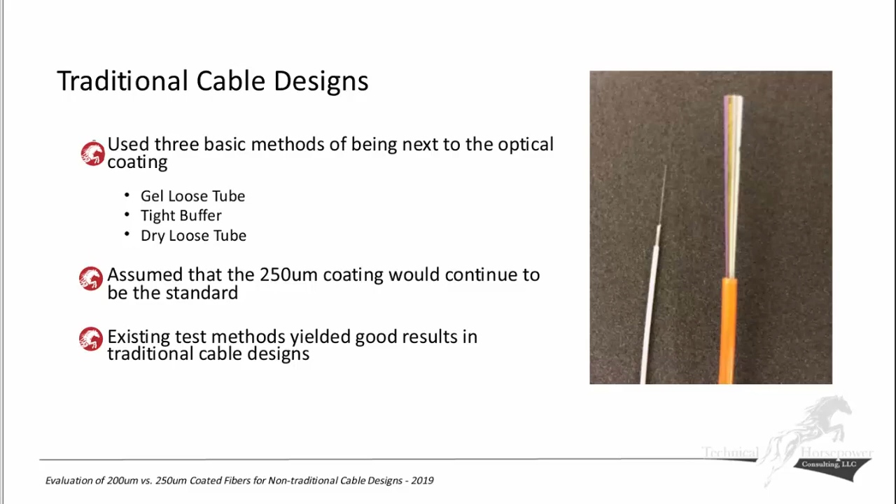Now, next generation cable designs, what are we going for? Well, we want smaller. We want them lighter, closer. Everything is packed in there. Basically, the magic number is more fibers per conduit. How much can we stuff in there?

Because our existing cable spaces are full of a number of old cables, many of which are still used, including copper cables. You have Cat5 cables in there. They all take space. And we want to reduce the costs, so that we remove extra materials and processes, and we provide more features with less. So it's a continuing growth process.

Now, when we do these things, we use a variety of things that we call our cable designer's toolbox. And those standard tools are specifications, which are pretty common and pretty familiar to most users, the history of our experiences, and a lot of this comes from end user demands. The smaller, lighter, easier to install is from the end users.

We also do a lot of testing, and that testing tells us what designs work, what designs have sensitivities or problems. I won't say failures because they're designed for a specific application, and if it fails the test, we'll know that. But other than that, we do very well. So a lot of these things I refer to as the basic designer's toolbox.

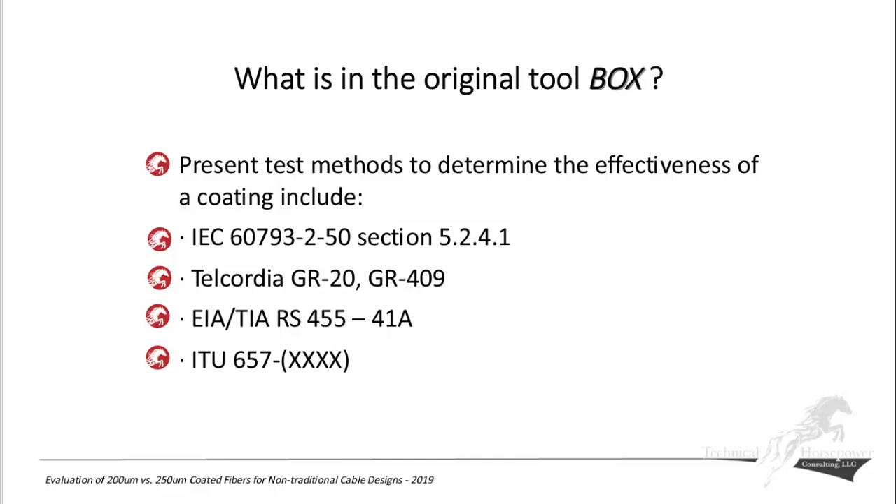So the question is really, what do we want to add to that toolbox? What have we added even to a great extent? Well, we've started with a new change, which is bend-insensitive fibers. These fibers allow us a lot more leeway in being able to manage the fiber before we stress the glass to the point where it wants to fail.

We've improved our water penetration control methods. Many of you who have been in the industry for many years will remember a variety of gels and, prior to gels, waxy substances used to block water in cables. Now we use a dry material. Basically, it's a high-tech version of disposable diapers. It's a super-absorbent polymer. Works quite well and does an excellent job of stopping water in its tracks. But it has its own set of issues that come with it.

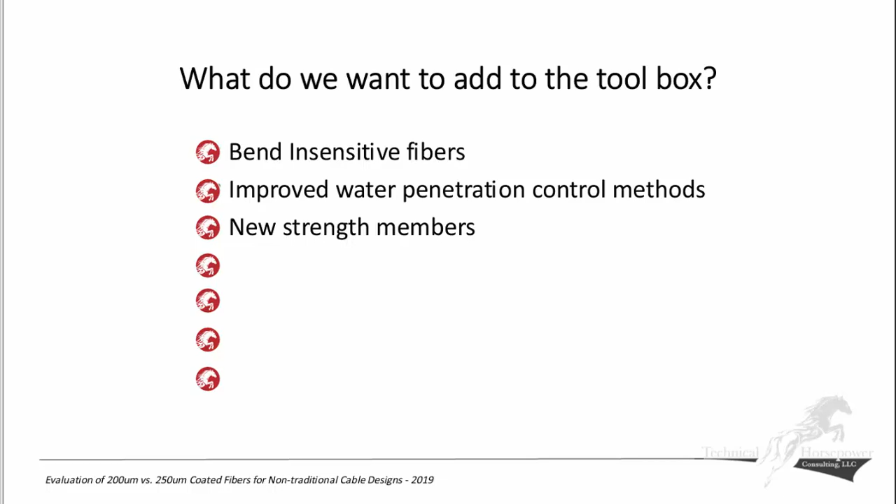We've developed a lot of new strength members. We initially used aramid yarns and, to a great extent, glass-reinforced plastic rods or even steel central members in cables. We now have a number of other materials, some of which are even extrudable. So we've added these basic components to the toolbox.

Again, we do multi-purpose layers. We're asking that a material do more than one thing. So, for example, a material might not only be a buffer, but it may also be an anti-fungus agent. It might be a strength member, but it might also contain a water-blocking agent.

We have better acrylate coatings. Over the years, we've seen significant improvements in how we coat a fiber to make it more handleable, more easily accessible, more usable in the field, more usable at a skill level of an installer that's not as high, and we therefore can use it in places where an installer doesn't have the clean comfort of a lab to work in, but rather might be working in a bucket truck on a pole or down in a manhole.

We've increased the ease of handling and stripping. We've developed methodologies in our toolbox to make cables that were easier to break open to get to the stripping. In some respects, we copied what was done for copper cables so that technicians in the field didn't have to change things.

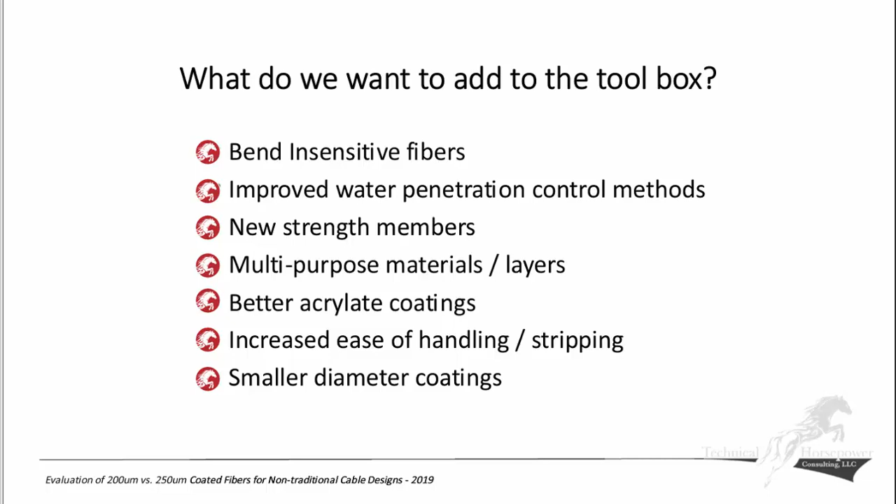And lastly, we're now going to smaller diameter coatings. This is the newest tool in our toolbox. And in this particular case, what we're doing is we are adding a whole variety of new materials. The real question that tends to come up with this is, how do we evaluate these tools for a particular job?

So we start to follow an old adage. This has been around for a long time, and you've probably heard this in numerous forms. When the only tool you have is a hammer, then every problem looks like a nail. So we try and fit a particular problem into a given test.

The real question that I focus on is that we find that our test methods tend to lag behind our new product designs and material developments. So we're actually falling behind in testing. We're using a test that may not necessarily be reliable or a standard that works well with the parameter that we're now looking to test. And I think this becomes a very, very big problem as we go forward.

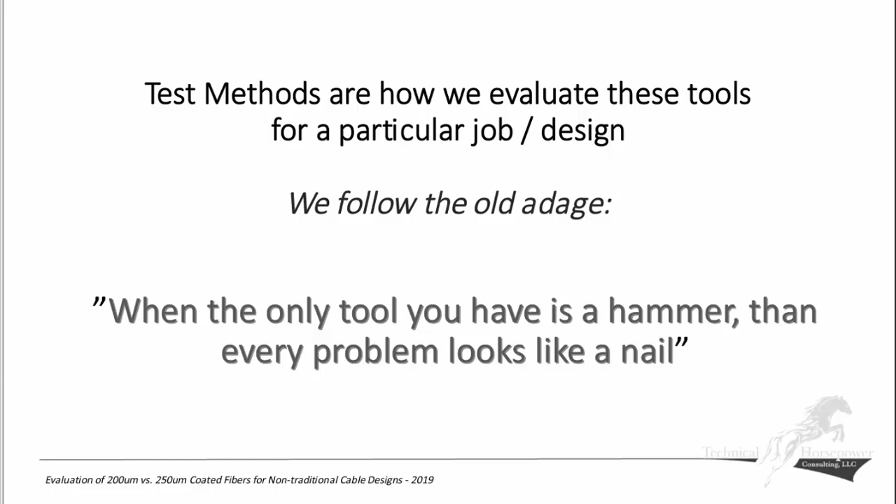So, having set the stage, I'd like to move now into the meat of this presentation, which is test methods for dealing with 200 versus 250 micron fiber. So the first question I have is, and this is how we came about creating these test methods, will the new coatings provide adequate mechanical protection against abrasive materials such as new types of strength members or crystallized coatings? And the crystallized coatings I'm referring to, for example, are the powdered coatings that are used for water-swellable protection, or in some cases antifungal protection and so forth.

And what we have to recognize is that we're seeing smaller and lighter cables, and 200 micron fiber is a natural for doing that, but it's a 48% reduction in our coating volume. So we now have a new problem for our non-traditional design. Do we really have the tools in our toolbox to evaluate this upgrade of a material and a process? When we make a smaller cable and we put it in direct contact with things like strength members, and the strength members have additives, some of these additives are very hard in terms of the crystals when they're dry.

So what we're really asking is how well will this 200-micron fiber hold up to what we now ask a 250-micron fiber to do? And we are more likely to have these fibers, whether it's 250 or 200 micron, in intimate contact with more and different cable components, various strength members, which may have these additives added to them.

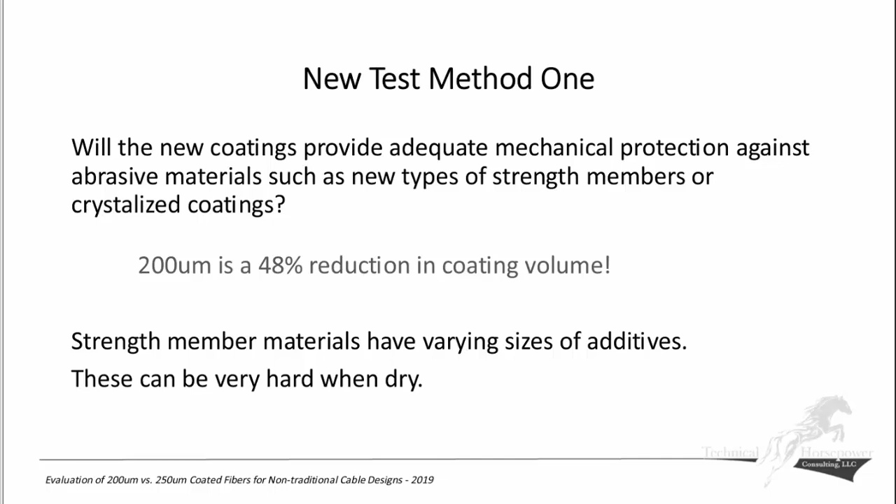So the usual question that occurs with something like this is, what can go wrong, right? Well, a lot goes wrong sometimes. So that's why we sat down and said, what are these additives doing? And we started to look at the additives we had, and this was a short list that I started with. And in talking with people, I found that that list is only the tip of an iceberg.

Being an old cable guy, I tend to look at things from the perspective of what we want to stop. We want to stop water. Initially, we wanted to stop fresh water. Now we're stopping saltwater penetration as well, which requires a slight difference. We also want no fungus or no mold to grow in the cables. We've learned this from experience. We also will put materials in there on our strength members or in our jackets or tapes or what have you for lubrication or processing ease.

But that initial list sounds great. Now we're adding components for flame retardancy, or for the ability to flame retard without creating, if you will, environmental issues. We're adding new materials to improve the fiber from being sensitive to rodent predation. We're adding materials to all these components to do multiple jobs.

So when we do all of that, if you just think about strength member types and the additives that go into them, it's a long list of unknowns. I'll give you a good example of a strange one, if you will. Think about a blown fiber tube that contains multiple fibers. And during the blowing installation process, you're shaking the tube and creating some aeolian vibration in there.

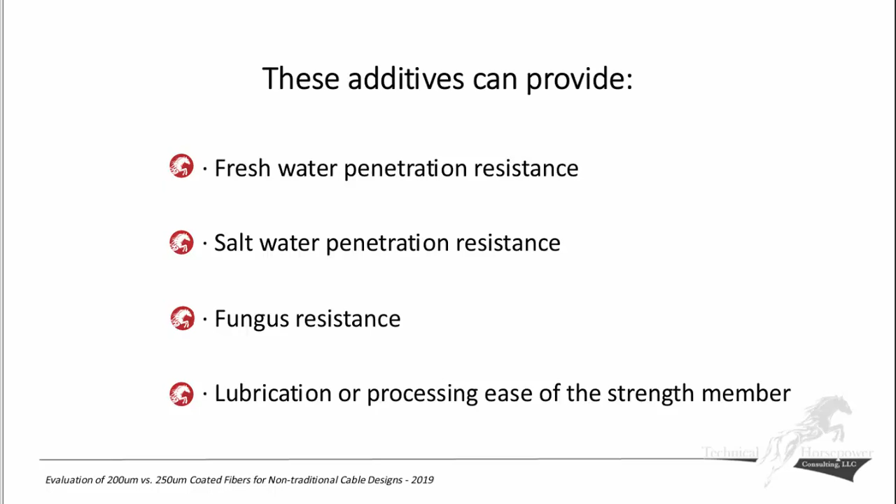So in that vein, we came up with this concept of taking an existing test, EIA/TIA FOTP-41A, as a crush test, and it gives valuable design data because it crushes things. But what happens if you now have aramid yarn coated with superabsorbent polymer in a dry crystal form in contact with the fibers? And the problem was that we only had 10 centimeters of distance under that test.

And with our super deluxe, and I'll use that nice term for it because I think the fiber guys have done a fantastic job of developing super low-loss single-mode optical fiber, over 10 centimeters you really can't see an increase in attenuation that would be substantial over an entire length of cable. So we needed a longer gauge length.

So we came up with the idea of extending the platen from 10 centimeters out to 25, and instead of one pass, folding it back and putting 24 passes on that fixture. So now we have a 6-meter gauge length, a little easier to see some results. And we said we're not talking about a flat, smooth, shiny surface, but let's start looking at a coated surface, something that would simulate the size of the crystals in a water-swellable component.

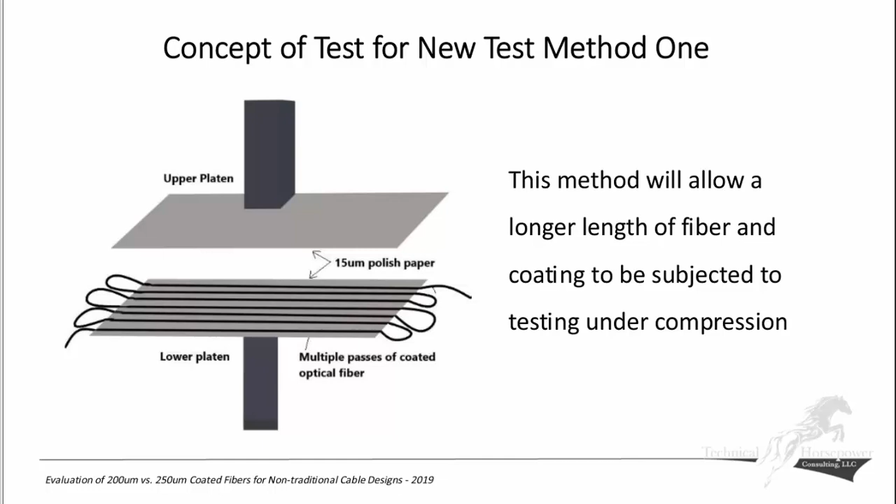Now, this is the actual schematic of the test setup. We used a kilometer of fiber ahead of that gauge length in order to eliminate any of the cladding effects that would have occurred from the source. So we were trying to be fairly fair about this and not try and look at a worst-case scenario. I believe that if you took the 1 kilometer out and did that directly, you would see a lot of cladding effects as well.

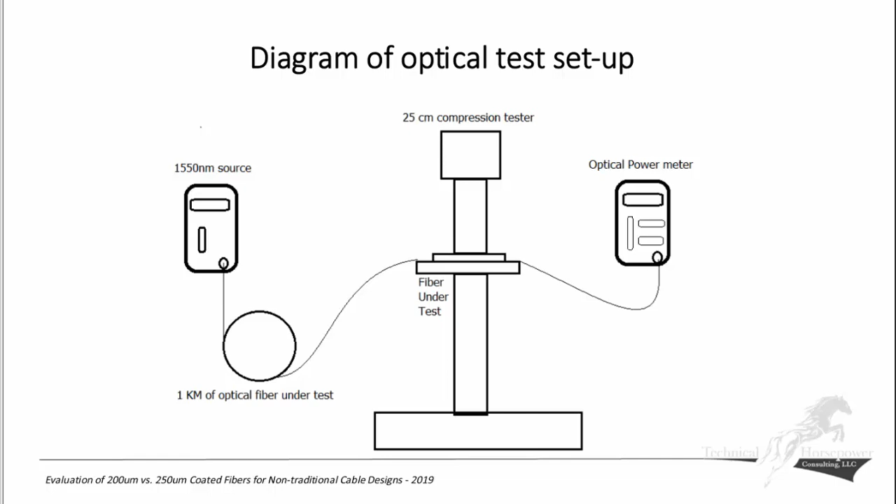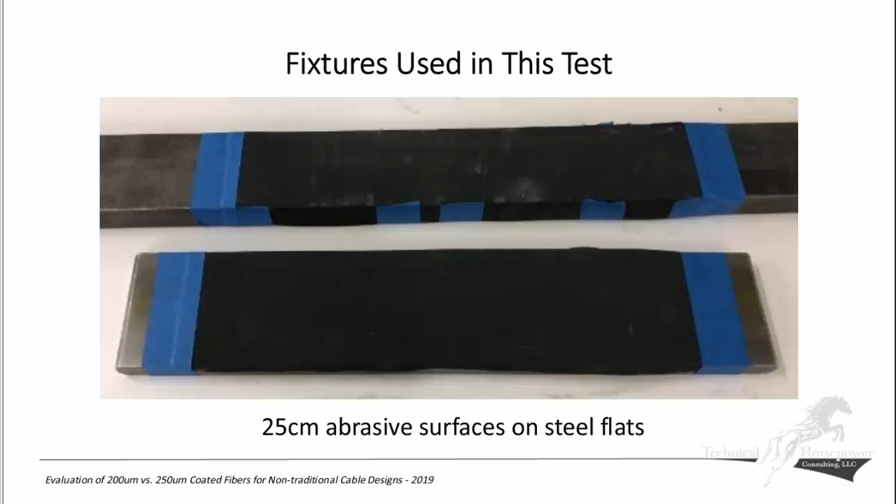One of the difficulties was finding a way to adhere the paper to the bars, which had been machined flat, so that they did not cause a problem at the edge of where the tape sat. We didn't want to have extra compression at those points, which create high loss points. And this particular one shows a 50 micron paper on there.

Now, we loaded that with fibers, and in actuality, this is one of the most difficult portions of this whole thing, loading that much fiber onto that bar and that platen and not having any of the fibers cross each other. We used a yellow fiber so we could see it, and it's even hard in this slide to see it, but it was the best picture I could get of that.

And to make sure that the upper platen did not impinge on any of the tape that you saw there, only on the actual surface, so that we didn't crush edges of the fiber and add additional strain. So we were very concerned about that.

But on a production basis, I would clearly build a fixture where I had the 24 slots on either side milled in so that I could lay this thing in much more easily than doing it by hand and physically chasing each one to make sure there was no crossover point. That was quite an interesting process to do.

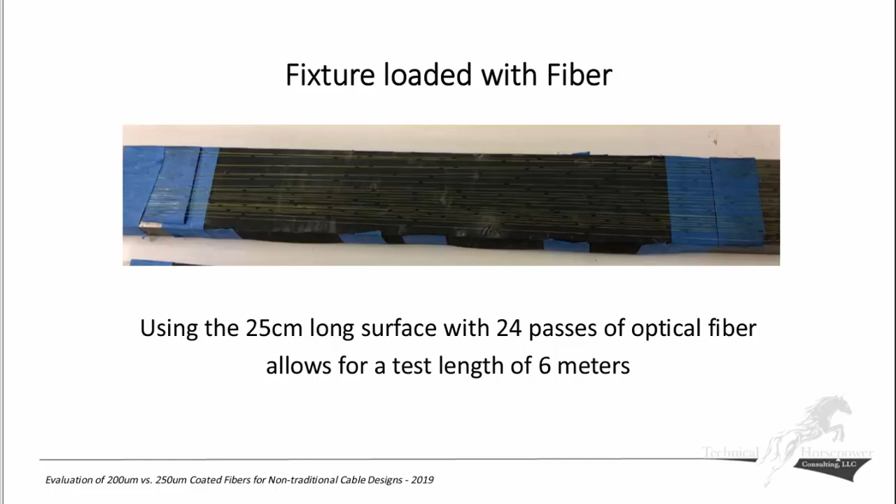Now, that generates a fixture that looks like this. This is our Instron tester. The 2 platens are up there being crushed with 445 newtons of load. Our parameters were 10 minutes of time. So we had 25 centimeters of area compressed times 24 passes, which works out to 17.8 newtons per centimeter. And the grits that we used were 15, 25, and 50 microns.

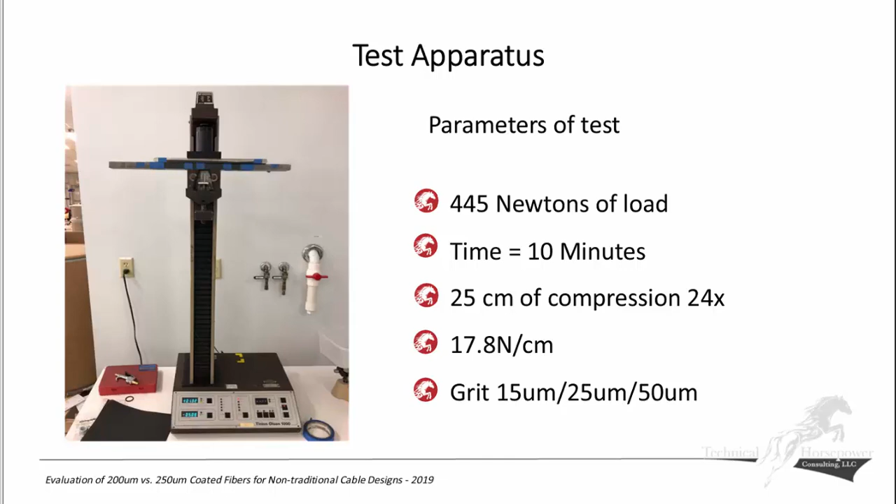So the end result is we had all of this information put together. We set this parameter up as our initial set of tests with the 3 different versions of this. This is what we measured. And here you see the post-compression results of one of the fibers under test. We used single-mode optical fiber, primarily G657A1 or A2, as we were able to get it from our suppliers. And we used a legacy fiber, G652.

Now, anyone who knows me knows that I never throw fiber away. So I actually had a spool of one of the major suppliers' fiber from about 10, 11 years ago, which had a previous coating system on it. And it was a G652 fiber, and I held on to that and used it as a reference fiber, if you will, as a control for the experiment.

And what we looked at was we measured the optical power at 1550 before, during, and after compression. We also looked at the examination of the compressed fiber coatings post-compression. And you can see on these fibers small indentations along the entire surfaces of the fibers. We were unable to identify the actual depth of the damage, but we wanted to make sure that we actually damaged the fiber in this compression.

So this is a picture of the 25 micron particles. The 15 micron particles actually did not cause any damage to the coating. So beyond this stage of the process, we did not include them in the further testing. So that was one of the changes that we saw in this process. We didn't run a report on something that wasn't going to change.

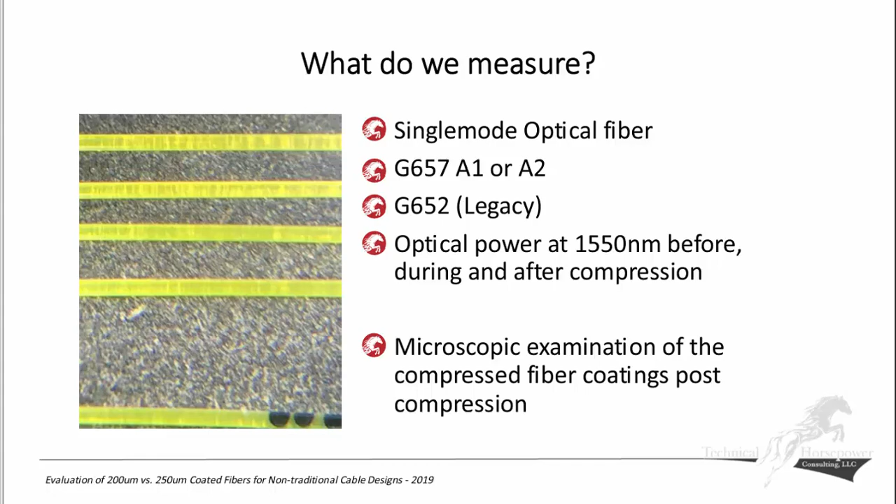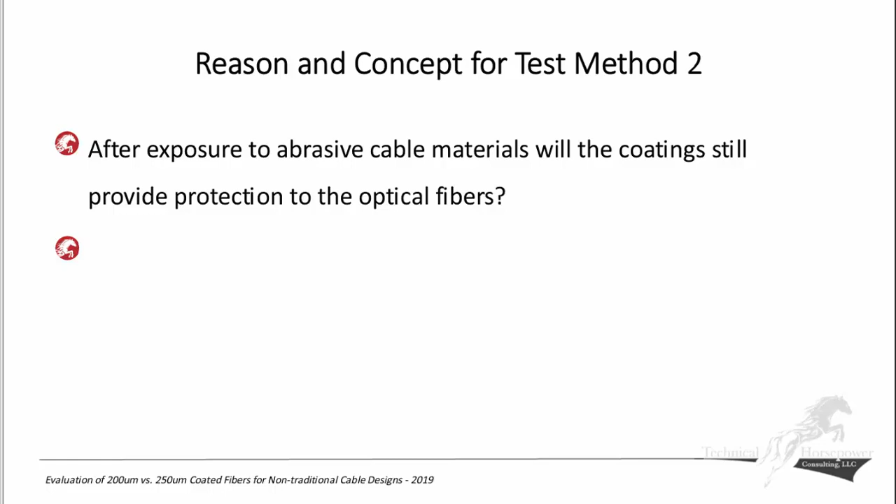Now, with that, we have to have a method of saying, what does this buy us? What did we gain by doing this test? Well, after exposure to the abrasive cable materials, will the coating still provide protection to the optical fibers? And this is a question that we wanted to find out. How do we decide that? So, we said, if we activate the water-swellable compounds, will it enter any compressed part of the coating and/or reduce the coating's performance? Our biggest concern here was, how do we do that?

So we looked around and we said, there's actually a pretty good test that's out there right now. And to that end, we chose to use coating strip force, because it's pretty much been an accepted method to test the quality of your coatings. If you looked at coating strip force before we, if you will, beat up the fiber, and afterwards, you have a pretty good idea of whether or not the moisture and the mechanical damage did anything to the coating. So we use that as our preferred qualification for test method 2.

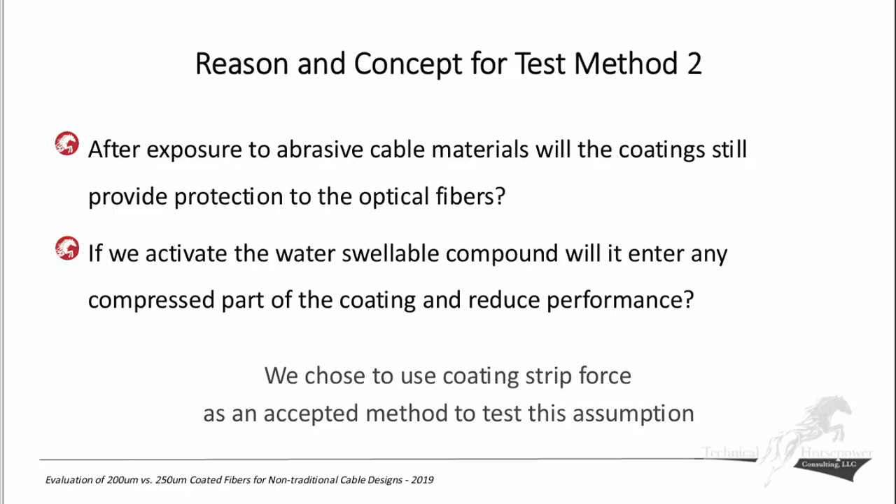And what we did in that is we took the post-compression fibers and strength members that were imbued with various water-swellable agents, put them in a Petri dish, activated it with fresh water, approximately 2-3 hours of time with the water, dumped out the excess water, and then allowed the powder to dry again.

24 hours after it was dry, we took it to the standard fiber coating test setup you see on the left, which was in the instrument. We used a standard tool and pulled 30 centimeters. And basically, the nominal values on this, per FOTP 178, is between 1 and 9 newtons for a 30 centimeter section of material.

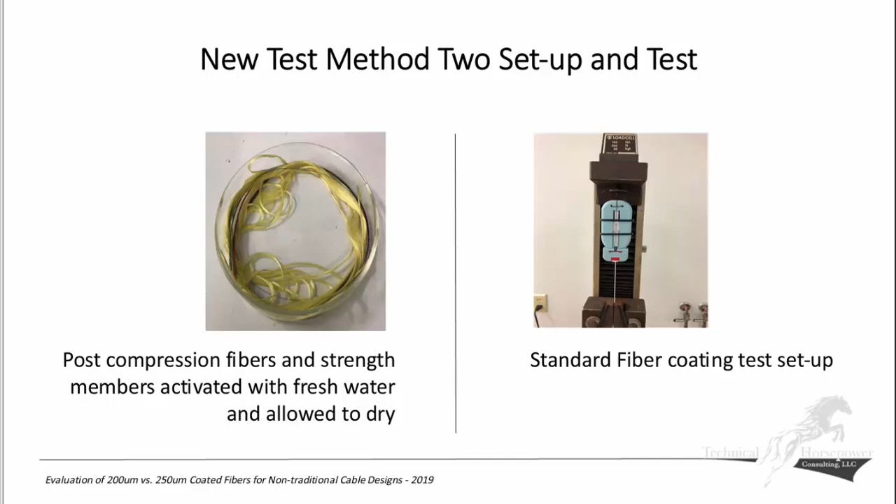So with that, we generated some results. Now, these are the 25 micron results. And again, we actually did a series of each of these. So rather than creating an eye chart for you, we take the data, and this is the average of 3 of each of those values.

So the legacy fiber, you can see, was a little higher initially, but under compression, you can tell the difference in coatings between then and now in value, in attenuation, and post-attenuation, pre-strip force, and post-strip force. You'll see a real significant difference.

Now, as we go down from fiber suppliers A, B, and C, you'll see that the values were pretty consistent. The 250 micron, slightly less loss than the 200 micron, but not a significant difference. And post-attenuation, they all pretty much return to their pre-attenuation, post-compression. The attenuation stayed pretty much where they want to be.

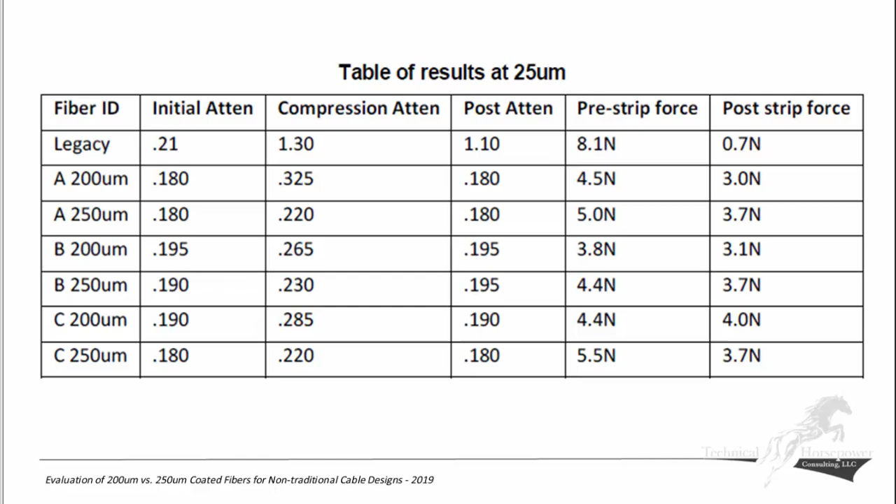The interesting part, and this is where we were quite satisfied with our choice of the strip force test, it showed a pretty consistent drop of coatings on the 200, 250. Slightly more on 200, but not statistically a large difference. And because we only did 3 of each, it wasn't a large enough population for us to get a standard deviation. But these are the averages of those 3. And not significant differences between the 3 samples.

There we go. This is at 50 micron, and here you'll see that we didn't even include the legacy fiber because at the 50 micron compression, the fiber didn't survive. Clearly an indication that our coating systems have improved significantly between 10 years ago and now. And again, the results between the two were a little more aggressive, but not significantly. Next slide, please.

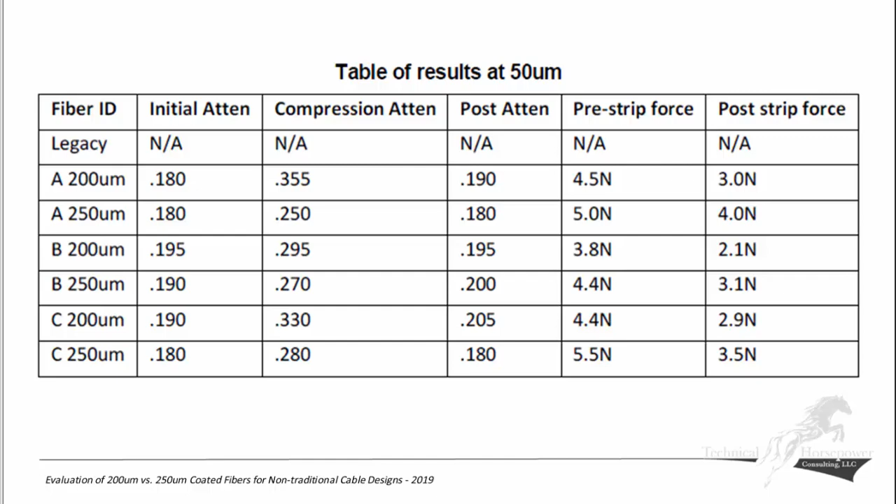So what the data showed us is that our coatings are sensitive to abrasive surfaces above 15 microns, at 25 and most likely at 50. So what that tells me is that legacy coating systems would not be viable, which we sort of expected in this more aggressive environment, which means that we can design cables today we couldn't design 10 years ago. Moisture access to the coatings is reflected in the ultimate coating strip force, so that's, I believe, a very viable test that we should continue to use, and it should become a much more popular tool in our toolbox.

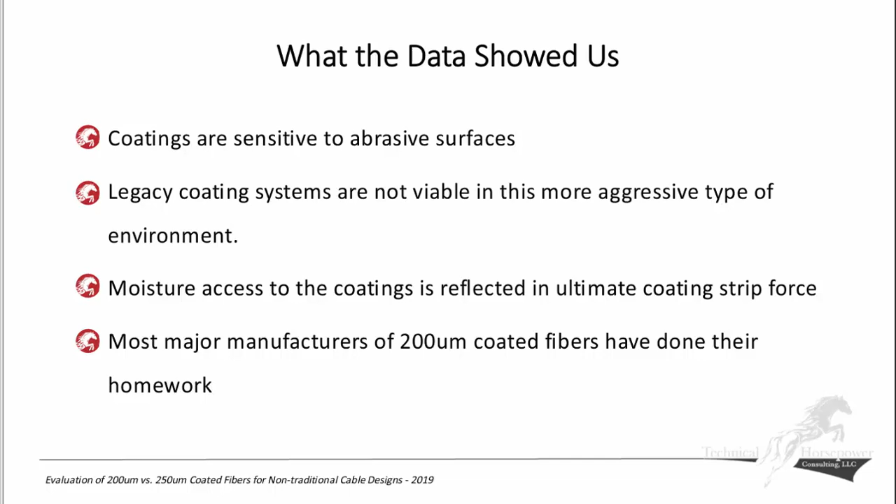And the good news in this is the major manufacturers that we tested of the 200-micron coated fibers have really done their homework. Even though it's half the material, the performance is almost equal to the 250-micron fibers. So I give it to the fiber people who make this stuff, who make the glass and the coatings. They have really done a fantastic job. Next slide, please.

And so where do we go from here? Well, it would be nice to do some temperature and humidity cycles, some, if you will, highly accelerated life testing or HALT testing on these. I'd like to actually vibrate the coated fiber samples while they're in contact with these abrasive plates. I haven't figured a way to do that legitimately at this point.

And as other fiber suppliers decide to provide 200-micron coated fibers, I would love to have samples to test. So any of the fiber suppliers out there who would like to get some of this test data, I would be happy to have you contact me and send me some samples. We can do some testing. Next slide, please.

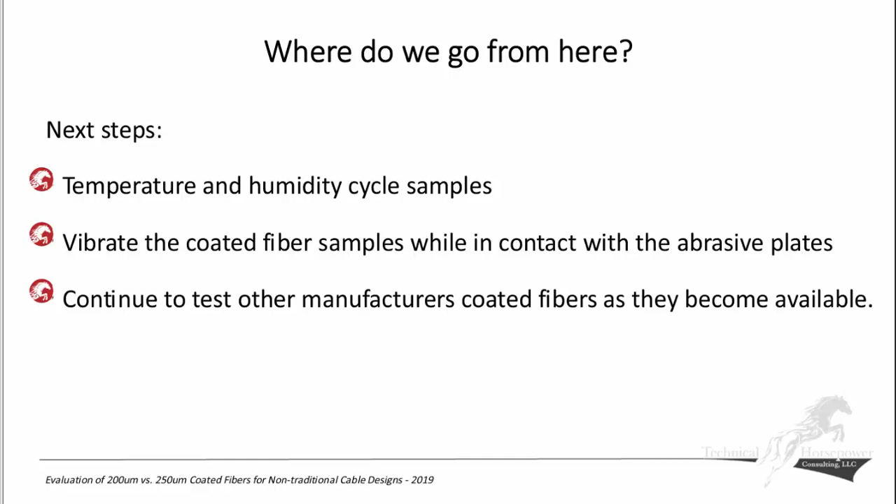And basically, the conclusions we've come to are that these smaller coating systems on the fibers will work in these very aggressive abrasion environments, as well as the 250, but way better than the legacy fibers. But we do need to do further environmental conditioning to validate long-term use. I think it would be important to see how we could do a temperature, humidity, or even a salt spray test. Both the 200 and 250 suffer in these very abrasive environments.

So we have to think twice about when we're manufacturing it, what kind of abuse do we do to this cable or to these fibers in the process, or even during installation? So those are questions that we should be asking now, and those questions are new ones to go in the toolbox. And every time we add a new material next to a coated fiber, we need to have some method to validate whether it affects coating integrity. And we propose these as example tests to do that. And then last slide, please.

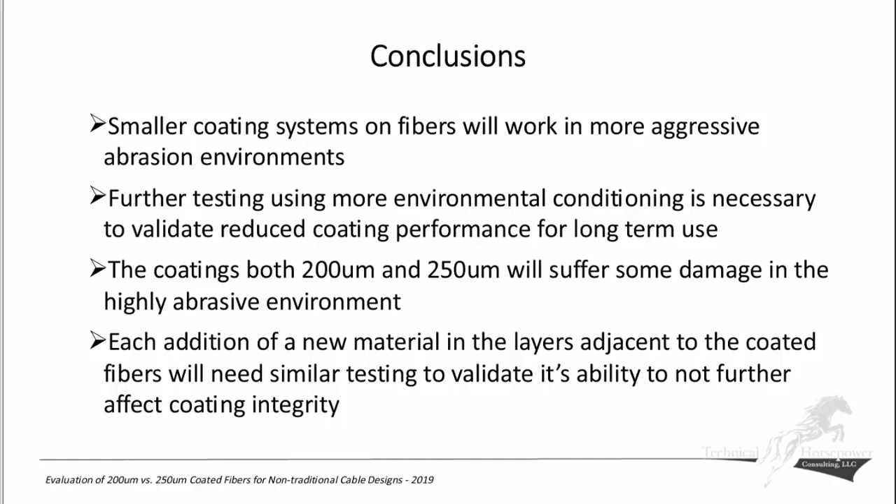And thank you, Wayne. At this time, we will take as many questions from the attendees as time permits. I'll start with this first question. Are gel loose tube, tight buffer, and dry loose tube fiber coating designs each used in both indoor and outdoor deployment applications?

All of these are used in different applications. Different manufacturers have come up with dry core tubes for both indoor and outdoor applications. They are quite successful in many of the different ones. Tight buffer has been used mainly in indoor applications or in tactical applications outdoors where it is generally going to be handled or processed, or the cable itself is being used in a more mobile application. Although some manufacturers have developed tight buffered cables for outdoor use that have survived quite well over the years.

So there are basically two fields for each of these, but you have to also recognize as we change designs, that becomes even more of a question that will change as time goes on, because we're no longer able to define just an indoor or an outdoor cable. And in many cases, we want a cable that goes from outdoor to indoor, so it's flame retardant, meets safety requirements, might be low smoke, zero halogen, but also able to survive 30 years out in sunlight.